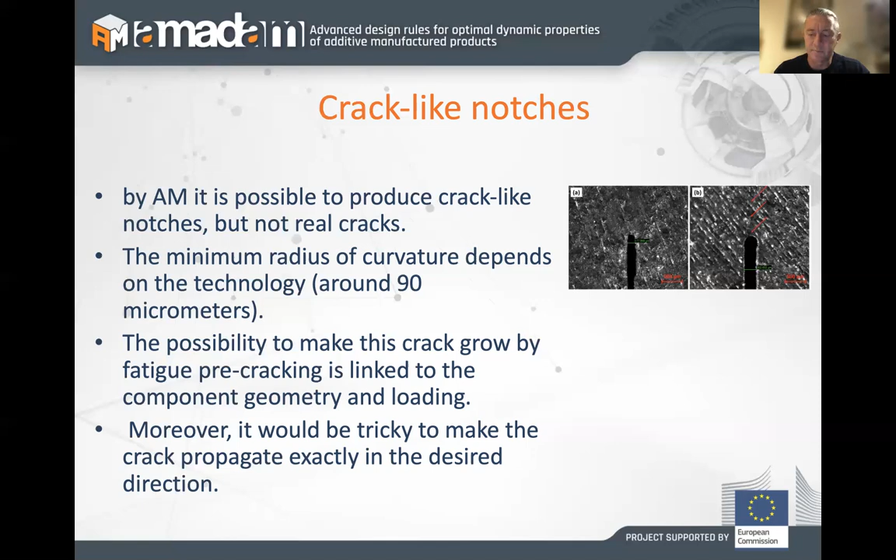We did some previous research before starting the project, of course. This gave us the idea. We started with something more common than the specimen we actually used in this project, the CT specimen, compact tension. The crack is here at the end of the notch in between the two holes. You see also the dotted pattern that we use for digital image correlation on the specimen. We tested the difference between manual induction of the crack by means of a razor blade and by additive manufacturing.

Here in the graph, you see the difference between the different build directions of the specimen. It can be seen that when you induce the crack by the additive manufacturing process, SLS here, there's a strong anisotropy as a function of where you put the crack. If the crack is orthogonal to the build direction, the properties are the lowest. This paper shows all the details of the work.

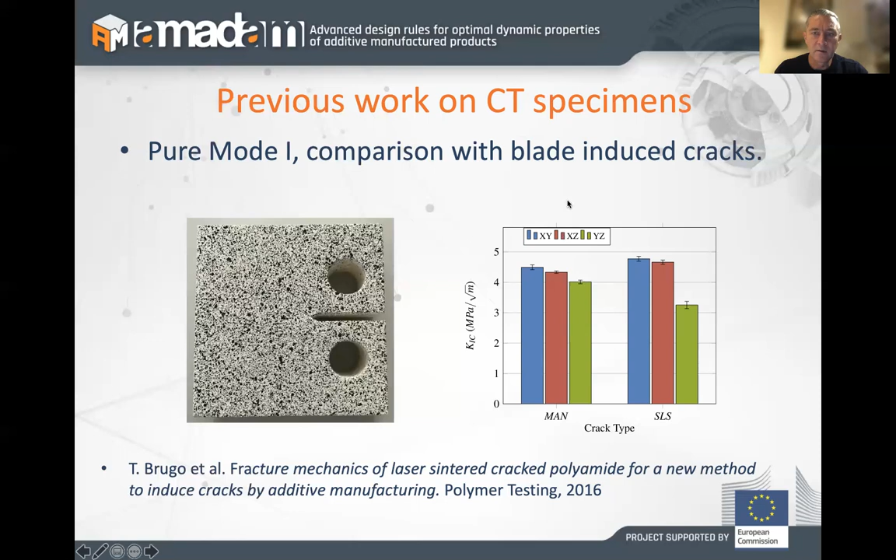Here you can see the specimens that we used. We made a previous work on this specimen, starting with plastics and also with other additive manufactured items. With these specimens, you see here the half disc. A variety of mixed modes is attainable as a function of where you put the rollers under the disc. So you have some degrees of freedom.

You have the distance S1, distance S2, and the slope of the crack alpha, and somewhat also the length of the crack, but that's not really important. It depends on the ratio between the length of the crack and the radius of the disc. So K1 and K2 are a function of the load, of the dimensions of the crack, and of two shape parameters, Y1 and Y2, that are calculated by finite element. More details are shown here in this paper of 2013.

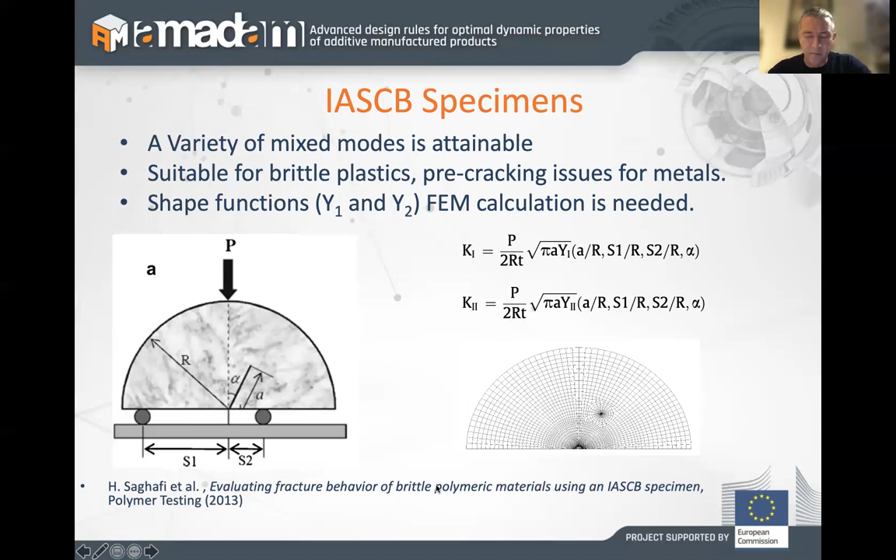As said, we use digital image correlation for detecting the displacements, the strains and the stresses of the specimen. Here you can see in the picture the whole experimental setup. You see it's very easy. It's just a camera and a PC with specific software to elaborate the images, and some device to apply the loads in a controlled way.

So we can measure the whole displacement field, and it's a full-field technique. You can get 2D data or 3D data depending on whether you are using one or two cameras. There are advantages in using two cameras, but also some complications of the setup, in particular as regards the calibration.

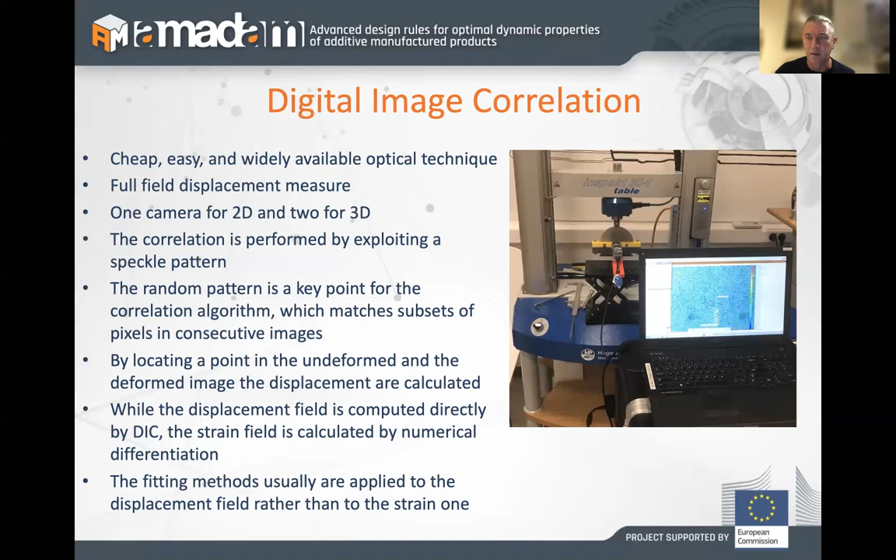The correlation is performed by a speckle pattern, and the key point is the randomness of the pattern, so that the computer can identify some points characterized by a specific pattern and see where these points go after deformation. So the computer can find point by point the displacement, and then by derivation you can get the strain. Sometimes all these data are automatically fitted by the computer to get smoothed plots.

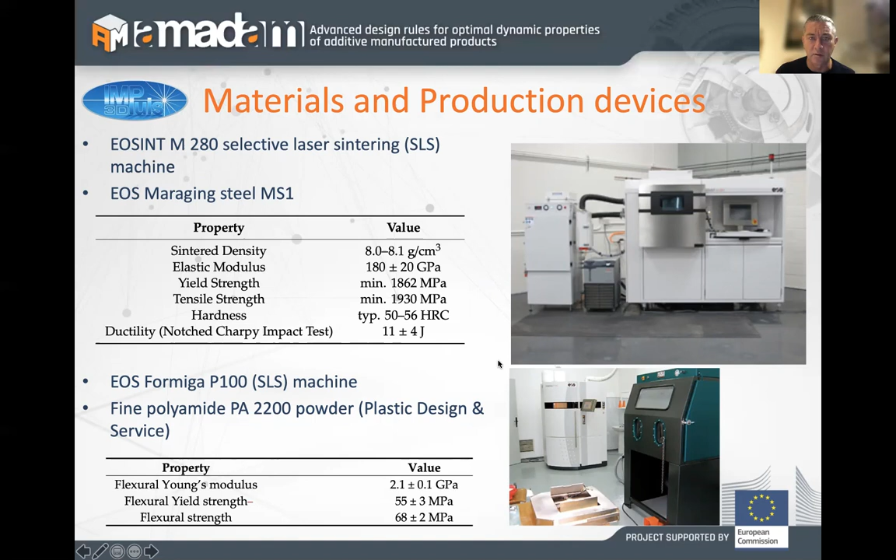To get these experimental results, we employed two different machines from EOS, one for metal and one for plastics. Both use the same principle: laser melting of powder that is deposited layer by layer. We used Maraging steel to test metals, and polyamide for plastics. You can find the data sheets in this slide, and in the picture are shown the machines available in the 3D Impulse lab in Craiova.

The measurement setup that we chose was 2D, because we don't have large displacements. We have a very small area of interest at the crack tip. We might want to change the zoom, and it would be complicated to do it with 3D measurements because you need recalibration every time, while in 2D it's much more straightforward. The only point is you have to guarantee that the specimen and the camera are always parallel, so we did it with a suitable experimental setup.

We used a free software to make the correlation, produced by GOM, and it's possible to download it directly from their website. With these parameters, we tested these configurations with different values of S1, S2, and the angle alpha to get different fracture modes: 1, 2, or mixed. And here you can see mode mixity. 3 specimens for each configuration. We also did some indentation tests when the calculation of energy was needed, in order to take out the energy due to indentation at the loading point.

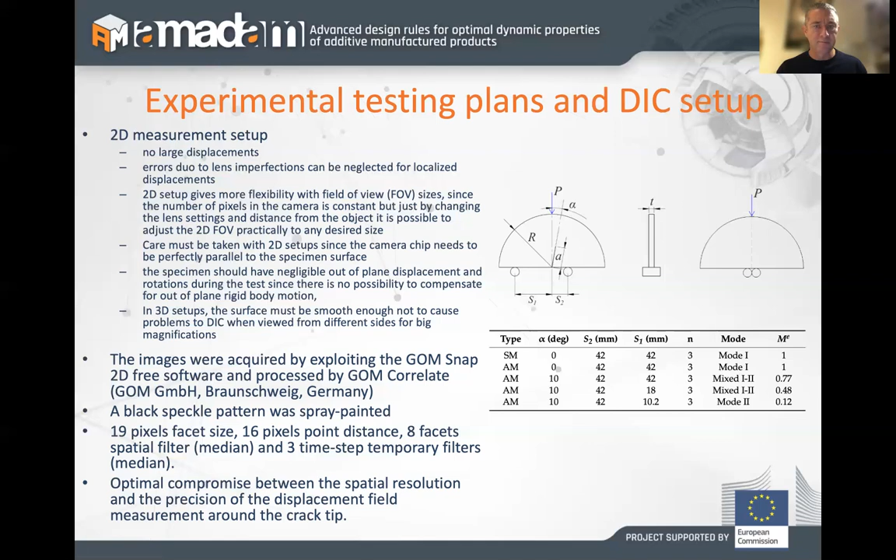The modeling part was different for the two materials because while the Maraging steel can be considered linear elastic, with very limited plasticity at the crack tip, the plastic cannot be considered linear elastic at all. So we modeled the Maraging steel by interpolating the experimental results by means of the Williams formulation, and here is the formulation, and the stress intensity factors are found from this formulation. You can find a full description of the method in this recent paper.

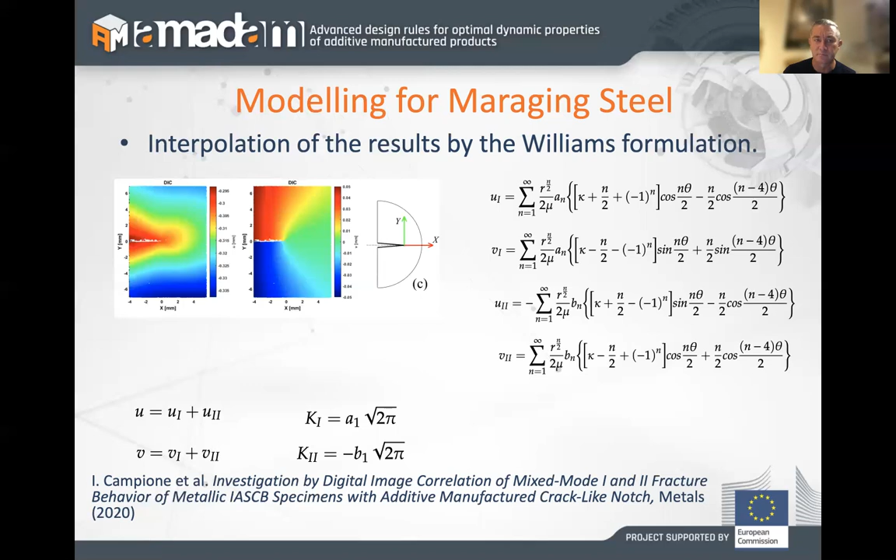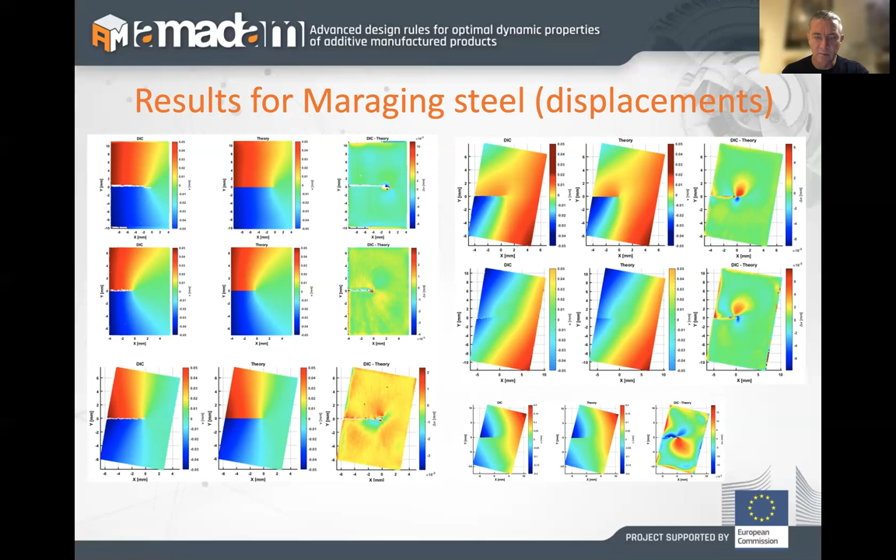And here in the table, the values of K1 and K2 computed by the standards, taking into account just the failure load. And here by digital image correlation, with a column of differences. Here we have also the two types of cracks. The first, SM, are cracks obtained by pre-cracking, not by additive manufacturing, and these are all by additive manufacturing. Of course, here we did it only in pure mode 1, because it's the only thing you can do with pre-cracking, and we cannot do differently, while with additive manufacturing it is possible.

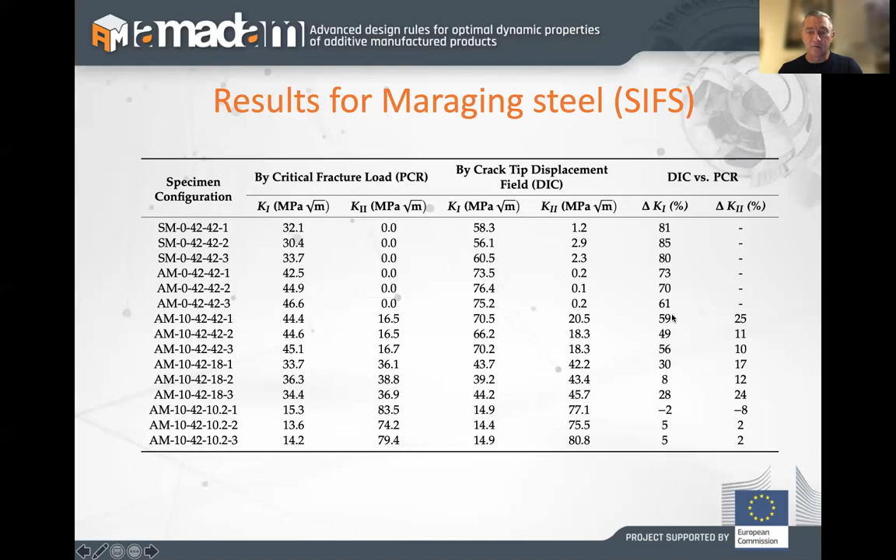Why is this? One could think it's probably the plasticity at the crack tip. That is not the point, because if you do some simple math, you find that this could account for 5% of this difference. The point is that K1 depends on a three-dimensional state of stress at the crack tip, while digital image correlation considers only what happens on the surface, and the surface is in plane stress conditions, while in general the rest of the specimen is not. And what happens when we change mode mixity up to mode 2? This effect disappears, because in mode 2 this effect is not important anymore.

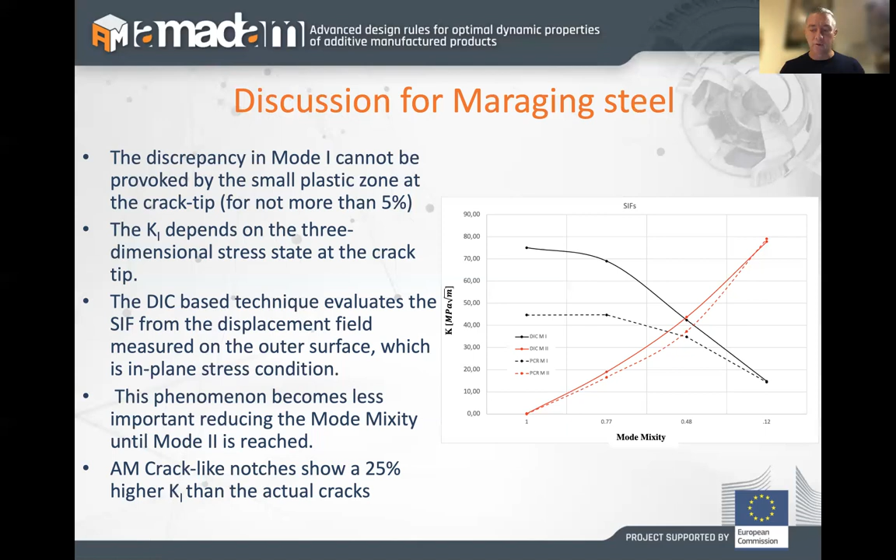For polyamide, we used a different model based on the J integral that is possible to use when you have a larger plastic part. So we used two methods: one, calculate the J integral from the load displacement curve by finite element method, and the second directly from digital image correlation. So here you have how it is

calculated, the J integral. You need the energy, and the energy should be computed without the indentation part. So we made tests and we took out the indentation from the energy. And here you have the expression of the J integral. I will not go into details to calculate it from both the finite element method and digital image correlation.

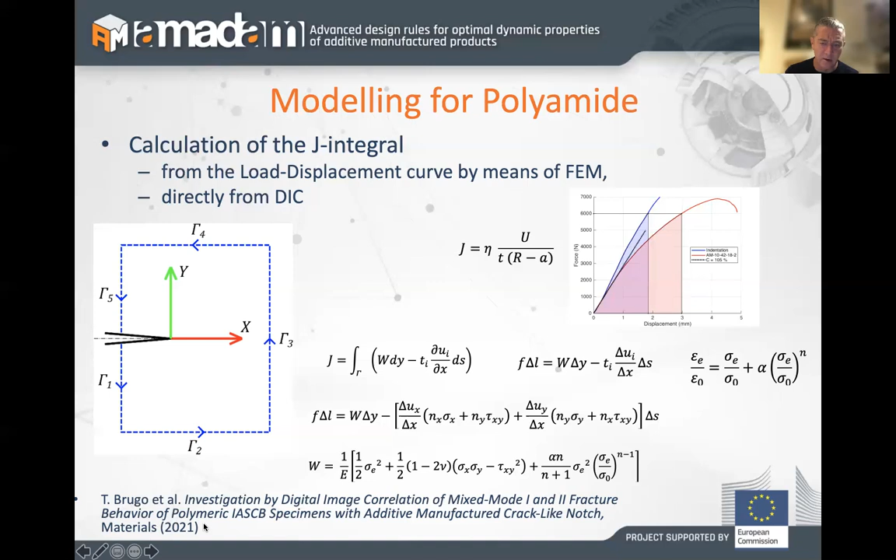To get the energy, we use the well-known Ramberg-Osgood constitutive equation. Of course, this is a point of investigation to get improved results, but we found out that also with this simple assumption, we got good results that are summarized in this paper published this year. So these are the results for polyamide.

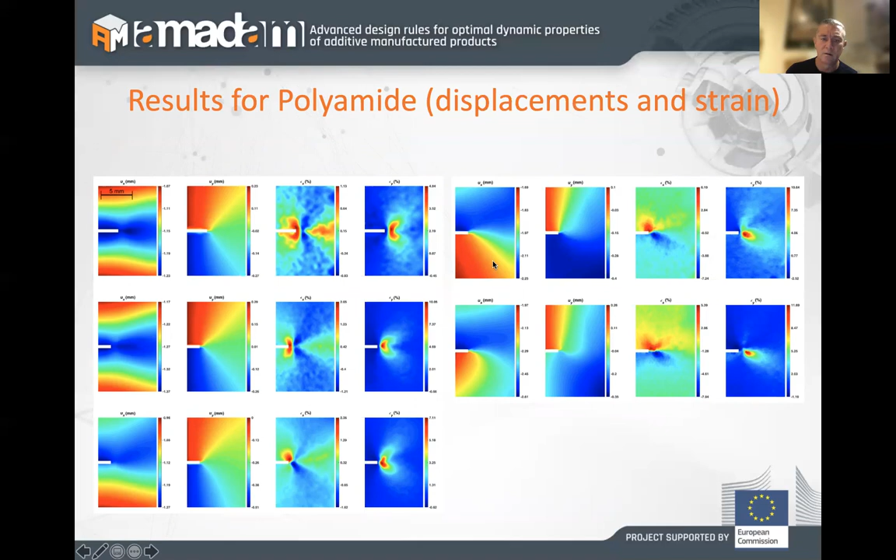We have the displacements and the strain in both directions, x and y. And from these displacement fields and strain fields, we get the J integral calculated in several paths. The J integral should be a path-independent quantity, but of course this is ideal; when you do it in a discrete way, if you change the path, you get

slightly different results. So here we have the mean J integral calculated over several paths for the standard method and the digital image correlation method. And you see that the results are, let's say, acceptable. Here in the graph, it's easier to appreciate that there are much less differences in the J in this case than in the stress intensity factor in the previous case.

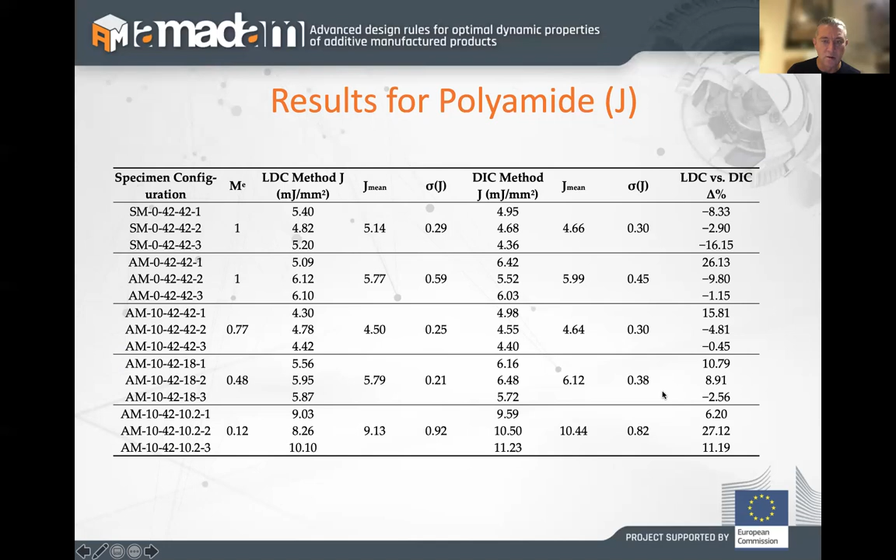So also you can see that the difference in J integral between the two cases, the pre-cracked specimen and the additive manufactured specimens in mode 1, is not so high. So in this case, it's easier to employ this method to make cracks in additive manufactured components.

And it is quite nice to see that the calculation of the J integral by DIC is a very precise method, and the point is that it can be used in real components. You don't need to have specimens, so you can just paint the external part of a component, load it, provided that there is a crack, of course, and get results locally.

So, as I told you, the J integral of the notch induced by the additive manufacturing method is just 12% higher with respect to the one obtained by standard methods, but this is within the experimental error. So we don't know actually if there is any difference. And we see also that there is, in general, for both methods, a minimum in the J integral function. So the situation is not pure mode 1. The mode 1 should be dominant, but with a component of mode 2 you need less energy to break the specimen. That is quite interesting.

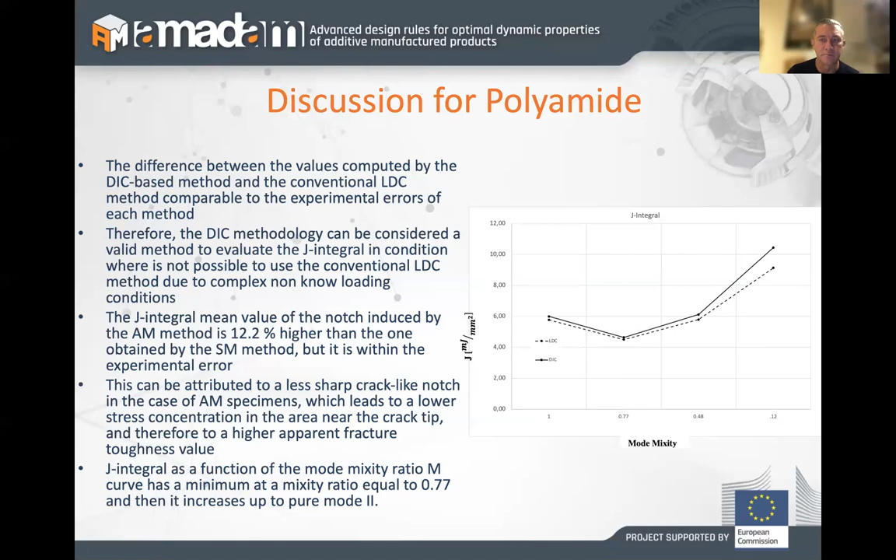Concluding, we have shown two digital image correlation based techniques to find out the fracture mechanics relevant properties of two different materials obtained by additive manufacturing with embedded additively manufactured crack-like notches. And what we found out is that it is possible to evaluate the stress intensity factors using the interpolation of the Williams model.

And it is possible to evaluate the J integral by digital image correlation with good approximation with respect to the standard methods. And we found out that the results obtained by the first method are overestimated in case of pure mode 1, while they tend to be similar to the standard methods when you go to mode 2, while for the J integral calculation, the results are perfectly in agreement with standard methods.